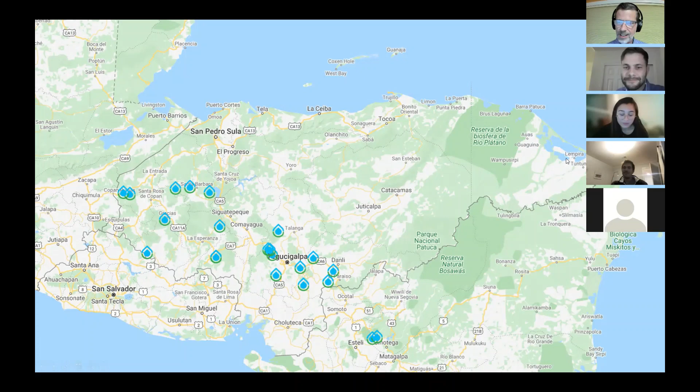And this is what happened. Last year, just a little over a year ago, 2 hurricanes went through Honduras. First came Eta, and there's its track. Then about 11 days later, they got hit by Iota. Those two hurricanes really dumped water on all of Central America, and obviously really hit Honduras and Nicaragua very, very hard. And there's San Nicolas.

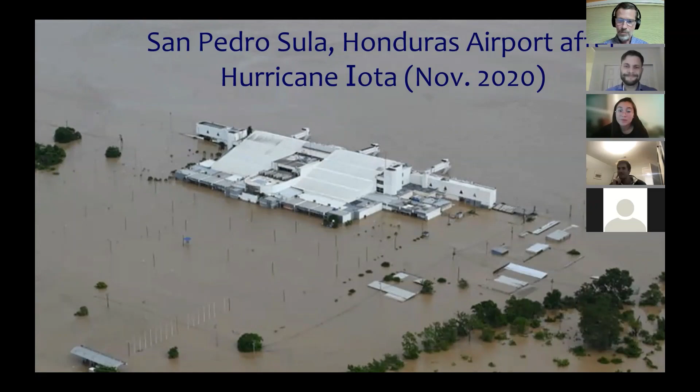I could have told stories about other plants, but I got good data for San Nicolas by going to Facebook. So Facebook is one of the sources of data for tonight. This is what happened in San Nicolas. And to give the context, this is the San Pedro Sula airport after the hurricanes - the airport where I brought several hundred Cornell students to Honduras over the years. So it gives you a sense of how much water hit Honduras.

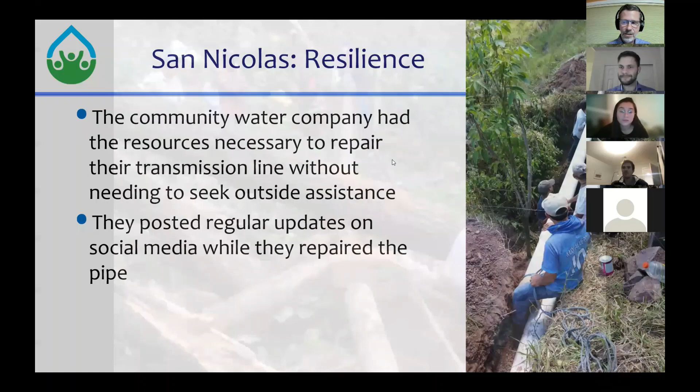So the story of San Nicolas is that the community water company had the resources necessary to recover from those hurricanes without needing to seek outside assistance. During the recovery effort, they posted regular updates on social media while they repaired their pipeline. The issue is that they have a 14-kilometer long pipeline, and there were multiple breaks in that pipeline due to rivers washing out the crossings. Here we see a tree that fell across their pipeline, and so they are getting rid of that tree.

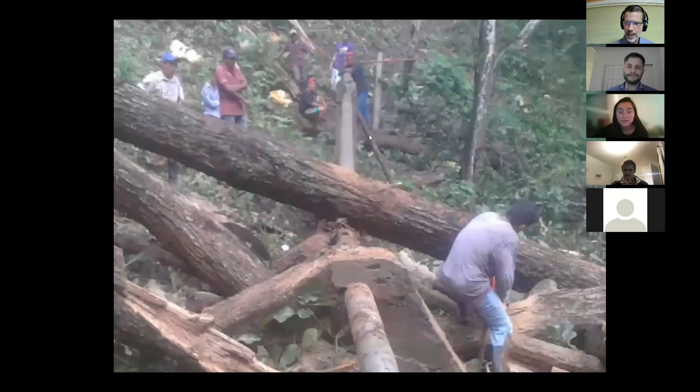They had to bring in more pipes to replace the pipes that were damaged or washed away. And so they worked for days to get everything repaired.

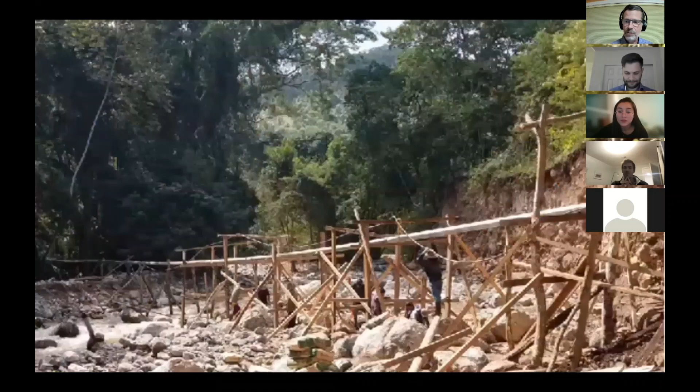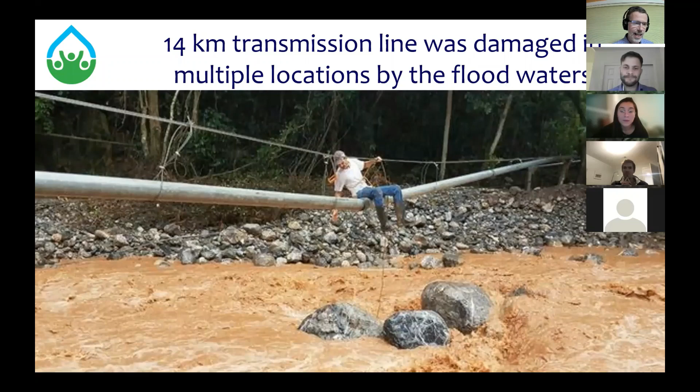You can see here one of the stream crossings where there clearly was a lot of fresh erosion on this stream from the hurricanes, so they had to reconstruct a crossing for the pipeline. And here's a pipe crossing where the pipe had broken. You can see the break right there, and here they are repairing that.

So all of that happened in about a week, and then they got water back onto the town. A week is a really long time to go without water, and there were lots of people posting on Facebook about how soon do we get water. But they worked at it, got everything fixed, and brought water back on.

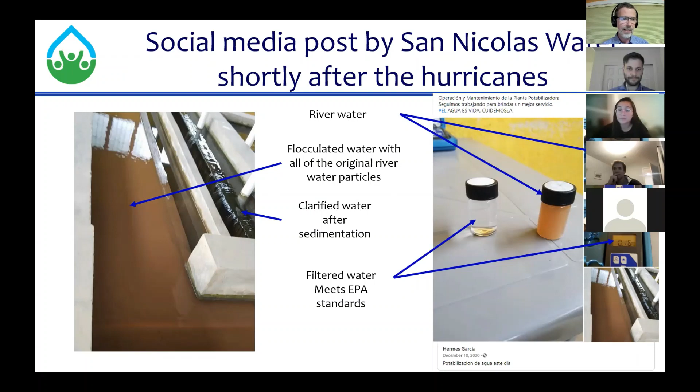Here's Tamara, the second generation AguaClara plant built in Honduras. Over the years they've consistently wanted to keep improving the plant to include the latest technologies that AguaClara was providing. You can see there's a blue section of the plant - that's where they added the stack rapid sand filter, added now 10 years ago. We're at the 10-year mark for the addition of the world's first stack rapid sand filter.

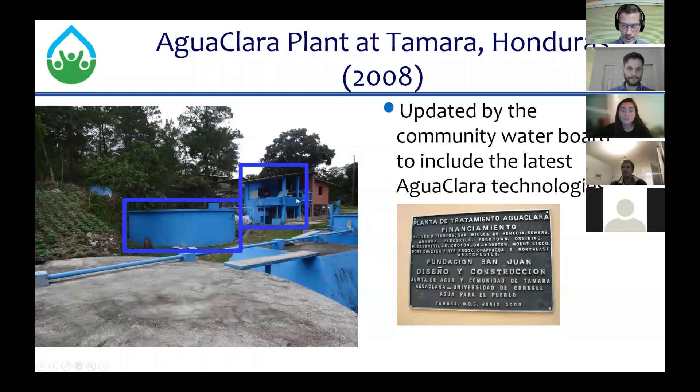They also completely financed, from the water tariff and from donations within the community from community members, this additional water storage tank so that they would have improved water service to the community. So all this is about investing in their own infrastructure.

Now a story about 4 communities in the valley north of Tegucigalpa, right next to Tamara. Another plant went in next in 2009, serving 4 villages that we now call Cuatro Comunidades. You can see where the water treatment plant is with the logo. Here's a photo of that plant and the operator Darwin. Inside the plant, it's a simple, 3rd generation AguaClara plant.

So now they have a water treatment plant, and they've got neighbors. There are communities close by who are seeing the difference in health of the children, and they're wanting water treatment plants too.

The next plant that really came online was Las Moras. It took 10 years, but Las Moras came online, funded almost entirely by the community. They raised community funds, saved for years to get the money. The women of the community really did the hard work of building that plant, and they've done it without outside donations.

So that's plant 2. The next one is completely different - this is Campo Verde, built by a developer. That developer apparently saw the benefit of having safe water for the development as part of the pitch, probably to get more money for those homes. So the developer looked at the Cuatro Comunidades plant and literally copied it - just looked at the plant and made another copy. Here it is - it's simple, it's rustic, and inside it looks a whole lot like the Cuatro Comunidades plant because it really is a copy.

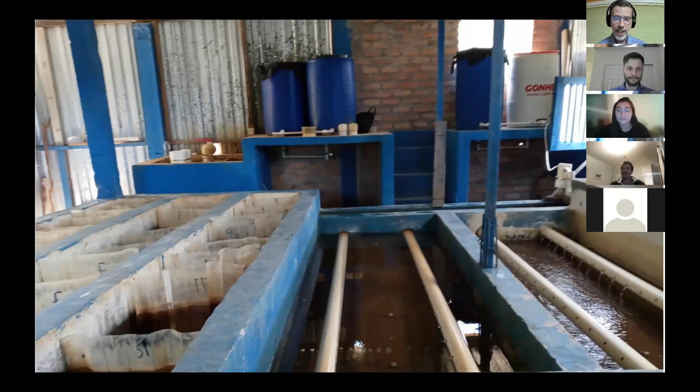So here's the Cuatro Comunidades plant, and there's the Campo Verde plant - they're just copies. So that's plant number 3. That plant was fully brought online just recently with additional technical help, because some of the inner parts were actually not done correctly since they were just copying and didn't get it right. But that plant has been fixed and brought online and is working.

The last example in this neighborhood is Divina Providencia. They built a competing technology, a multiple stage filtration plant, in 2010. That plant didn't work, and so they still don't have safe drinking water.

They have been trying to figure out how to get an AguaClara plant. This week, some of the women from that community were in the Agua Para el Pueblo offices, and paperwork is being signed - they are starting that project and will be obtaining financing through Azure, which is with the Catholic Relief Services. It's a finance program that will provide them with a loan to build the plant, and then they will pay that back over the next decade or so.

So 4 communities right next to each other. Once one community had a plant, they were all really eager to get an AguaClara plant as well. So the highlight here is that communities thrive with AguaClara. Households are willing to pay a higher tariff so that they can protect their watersheds, improve their water infrastructure, and be resilient when there's a hurricane. They're able to recover from a natural disaster, and the communities are eager to acquire AguaClara water treatment plants.

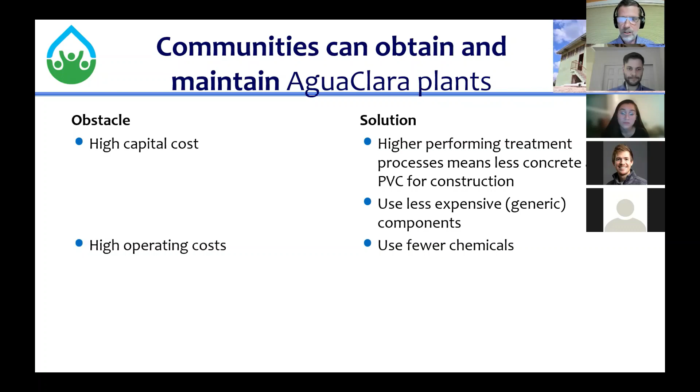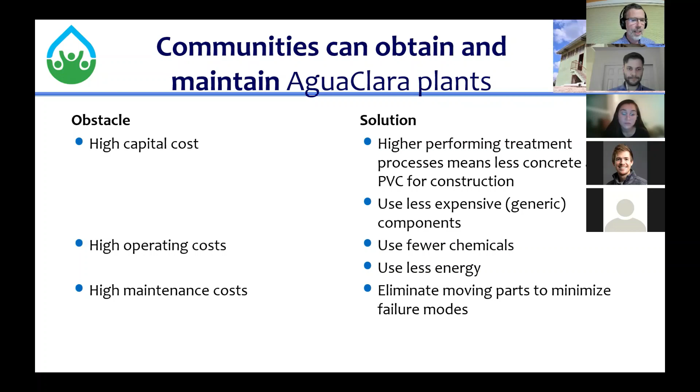To make it easier for communities to obtain and maintain their plants, the obstacles have been high capital costs. We're working at that by using high-performing treatment processes, which use less concrete, fewer bricks, less rebar, and less PVC, making them lower cost. We also use less expensive generic components rather than specialized proprietary ones. To reduce operating costs, our plants use fewer chemicals and much less energy. And to reduce maintenance costs, we eliminate moving parts to minimize failure modes. All of this makes it easier for communities to adopt this technology.

So what's our niche? Where does AguaClara fit into the global picture?

So let's think about this. There's 7.9 billion people on the planet, and people live in different sizes of settlements, everywhere from a single household out alone by itself, all the way up to Tokyo. At the single household level, maybe there's a few people, somewhere between 1 and 10 people, and all the way up at the other end of the graph is Tokyo with 37 million people. Everything else falls in between. I guess hermits are slightly down below that.

So the question is, where are all the people? The 7.9 billion people, I'm going to put them in these decades, groups of 10. I have pretty good information about where the people are at the upper end of this scale, and did some good guessing about what's happening at the lower end. I might be off by a factor of 2 in these numbers, but I think the point is still very clear. I've put the 7.9 billion people across these categories of sizes of human settlements.

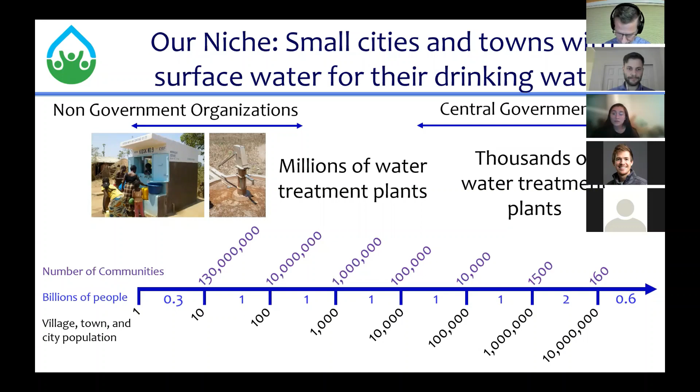When I began the AguaClara program—or maybe I shouldn't take credit for that, because I feel like students forced me to do this—anyway, when students forced me to begin the AguaClara program, there's a whole story there. Early on, we had this insight: we don't have the time to design custom water treatment plants for two communities per year.

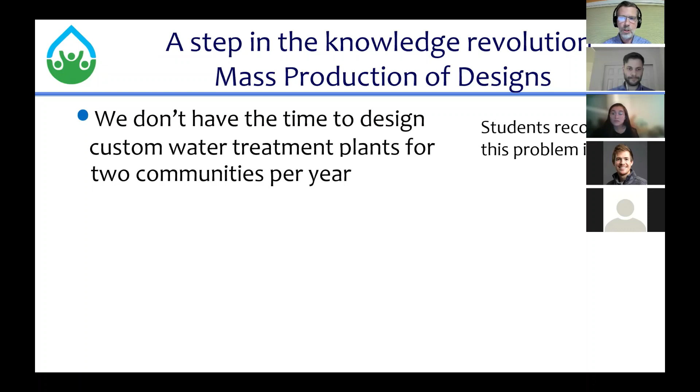At that time, we were just thinking about the thousands in Honduras. Just two years into designing, after designing the first plant and then the next two plants, students came back to me and complained. They said, we don't have the time to design custom water treatment plants for 2 communities per year. That was one of the things that really pushed me to begin thinking about how do we automate this design process.

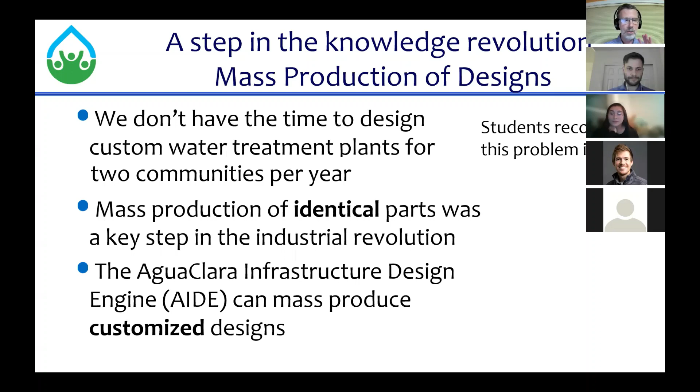Mass production of identical parts is something we all know about—that's part of the Industrial Revolution. The AguaClara Infrastructure Design Engine, or AIDE, is not about mass producing parts, it's about mass producing custom designs. So it's looking at it in a very different way, not mass producing parts, but mass producing customized designs.

So imagine this: imagine being able to instantly design an airplane based on the desired number of passengers. You'd go to your computer, pick your favorite language, and type in something like 'design airplane, passengers equal 4,' and there you go, you get a Cessna airplane. Then you decide, wait a second, I want a bigger airplane. So you type in 'design airplane, passengers equals 525,' and you get an Airbus 380.

Wouldn't that be amazing if you could just do that, simple, done, and get everything about that airplane? When you do that design, all the parts change—the type of engine changes, the number of engines changes, the number of decks on the aircraft changes, the size of the fuel tanks changes, the number of exits changes, everything changes. But there's one thing that doesn't change: in all cases, it has to fly.

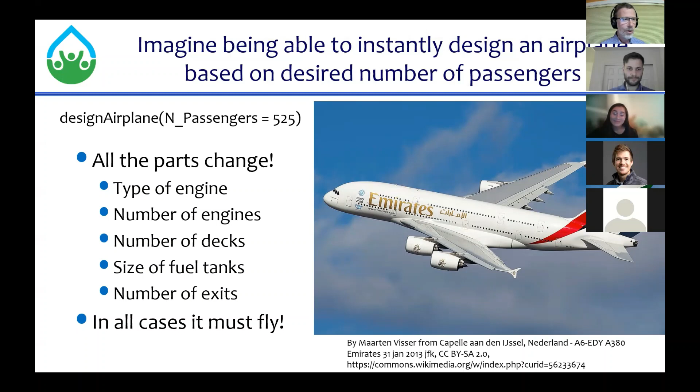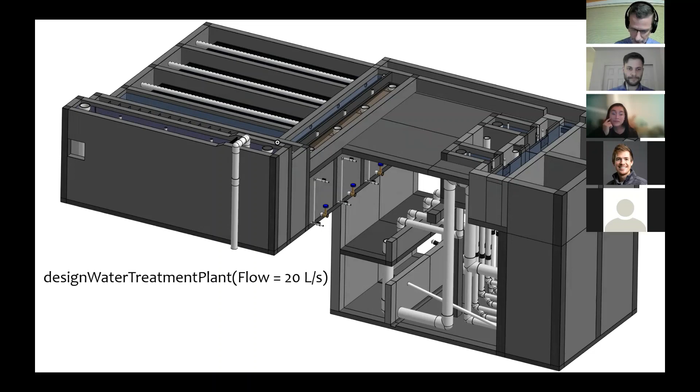And that's kind of like what we're trying to do. We're trying to design water treatment plants where you can type in a flow, say 20 liters per second, and get a design back for that water treatment plant. And if I change that 20 to 100 or to 2, I get another design back. And in all cases, the plant has to produce safe drinking water.

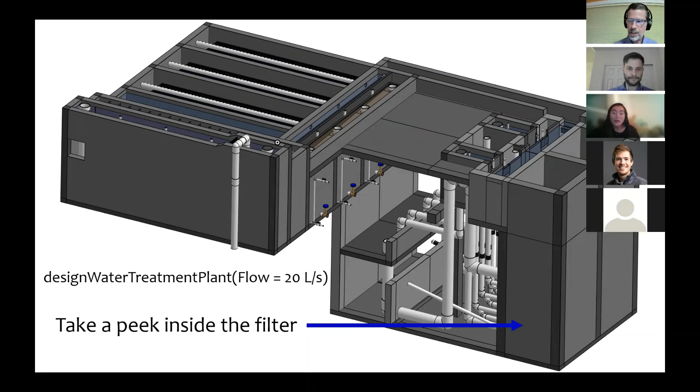And these designs have to be at a really high level of detail. They have to show all the parts. So just to illustrate that, we're going to take away the walls and look inside the filter. Inside that filter is a whole mess of pipes and parts, and there's detail like that throughout the plant that has to all be there so that it can be built.

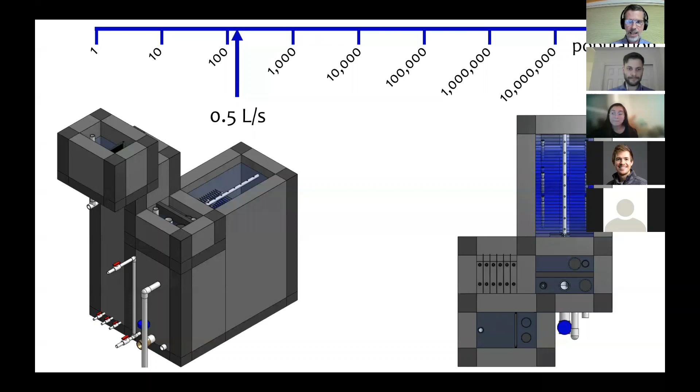And we have this problem of a wide range of community sizes that we're trying to provide designs for. So we're going to start at the bottom end of the scale, at about half a liter per second, which would be good for just over 100 people. Here's a potential design created by AIDE, the AguaClara Infrastructure Design Engine. It has an entrance tank, a flocculator, a clarifier, and it's tiny—its measurements are just a few meters long.

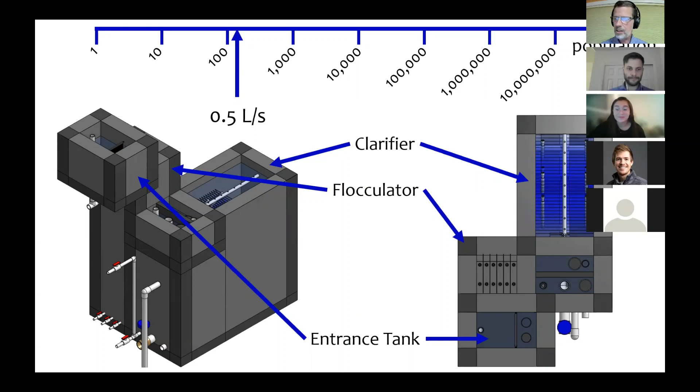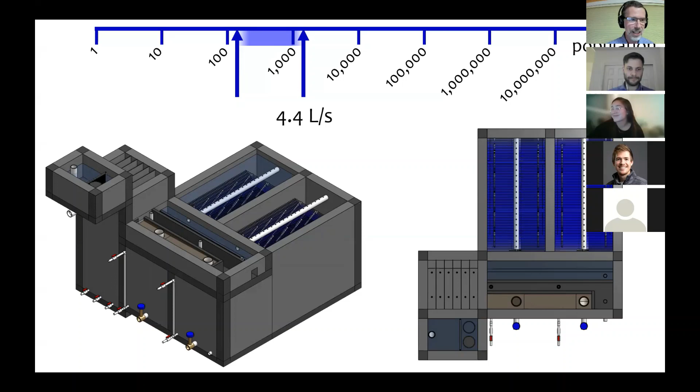We're going to go up again, now to 4.4 liters per second. Now we have 2 sedimentation tanks, so the number of engines just increased—we got 2 instead of 1, but we're still going to make safe drinking water.

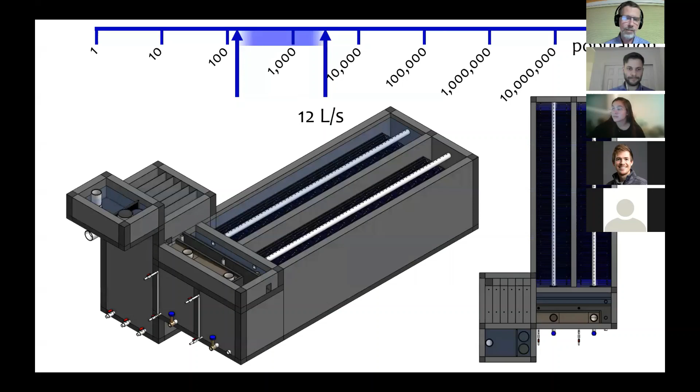We'll increase again, to 12 liters per second. Now our sedimentation tanks got a whole lot longer. The flocculator got bigger, the entrance tank got bigger.

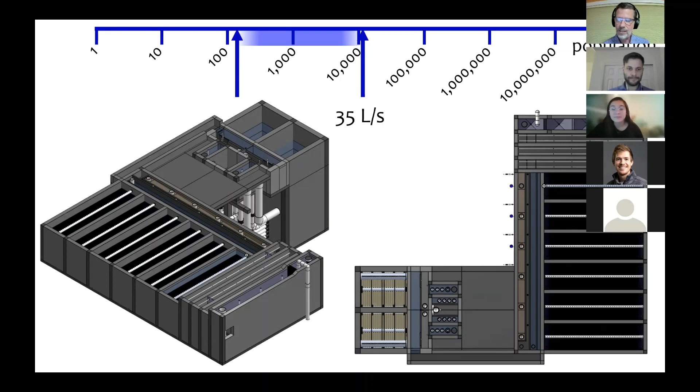Let's go bigger, to 35 liters per second. Now we're changing the design—we're switching to a stacked rapid sand filter made out of concrete. The reason I didn't show a stacked rapid sand filter in the previous designs is because that's still on our to-do list. So now we have 6 sedimentation tanks, a new version of an entrance tank, and a different version of a flocculator. We've kind of swapped out the kind of engines that we're using.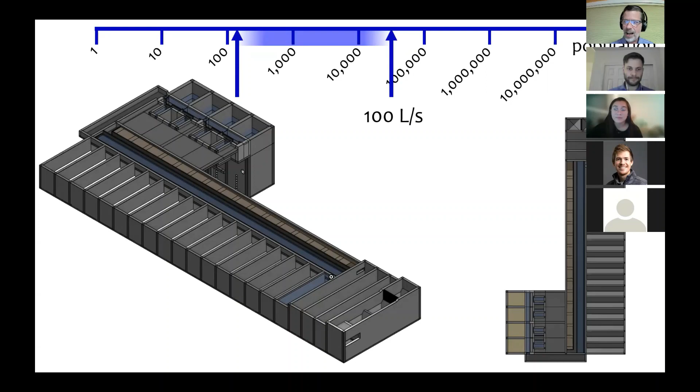And the last one, now we're up at 100 liters per second, a much larger plant. I'm no longer showing any details within this because it's too big of a design to actually show all the pieces. But there's 100 liters per second, 4 filters instead of 2. And at each of these designs, there's so much detail and so many things that have to be created—every single pipe has to be drawn, sized correctly, and placed in the right location. All that is done in the environment we're using, which is Onshape.

There are 2 more really powerful capabilities that this design tool has. It has the ability to create a bill of materials, which is like a parts list with prices and supplier information—details about where this part actually comes from. And the design is customized to use the parts and construction techniques for each implementation partner. So if Agua Para el Pueblo wants a plant or Gram Vikas wants a plant, the parts that go into it will be different, and the plant will be drawn differently because of that.

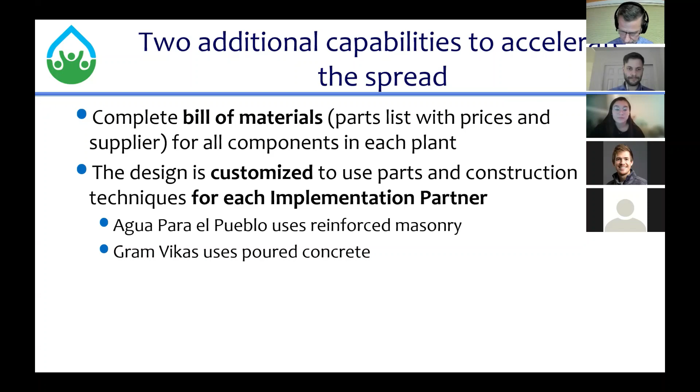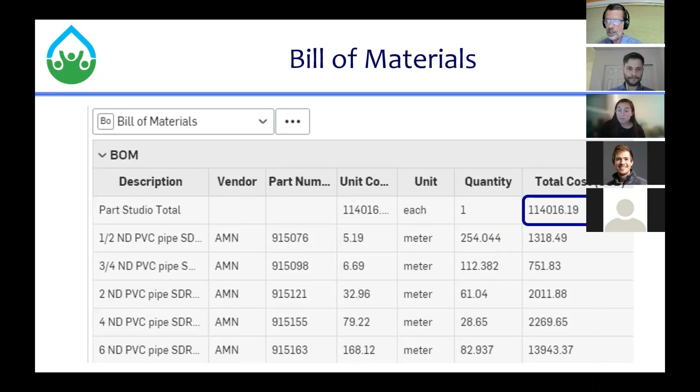So here's an example of the parts list—don't worry, we're not going to go through this table in detail. I just want to show you it creates this messy long table of all the parts. If we look in detail at just one part, there's a half-inch PVC pipe. We know who the vendor is, we know the part number, we know how much it costs, we know how many meters of pipe there are in this plant, and we know the total cost of that piping. We also know the total cost of the materials that go into making this plant—this was $114,000 just in materials for that particular plant.

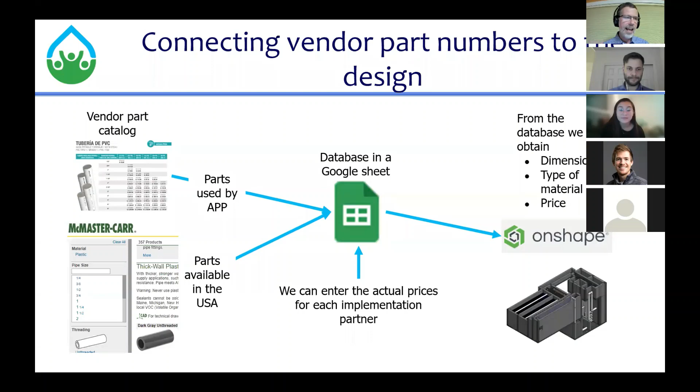So how do those parts get in there? It starts with parts catalogs, the information we get from the implementation partners about where they get their parts. We put that in a Google Sheet that ends up being transferred into Onshape, and every part, as we create it, is pulled essentially from that database. So when we're drawing a pipe in Onshape, we have to say, who's that pipe for?

Is it for Agua Para el Pueblo or Gram Vikas? Because they're going to have different suppliers. And then we say how big we need that pipe to be and how long it needs to be. We get a pipe in Onshape, it draws the pipe for us, and it immediately puts it in the parts list so that we know what that part is and how much it costs.

One of the cool things that this allows us to do is to immediately see the impact of cost on our designs. So when we're comparing different design alternatives, we immediately see at least what the parts cost impact is.

So this automated design approach reduces the project startup costs and makes it easier for communities to go through the project cycle, where they're not caught in this trap of needing money to get started, needing money to get a design so that they can actually get started. This allows us to provide designs at no initial cost because it doesn't actually take us much time at all to provide that initial design.

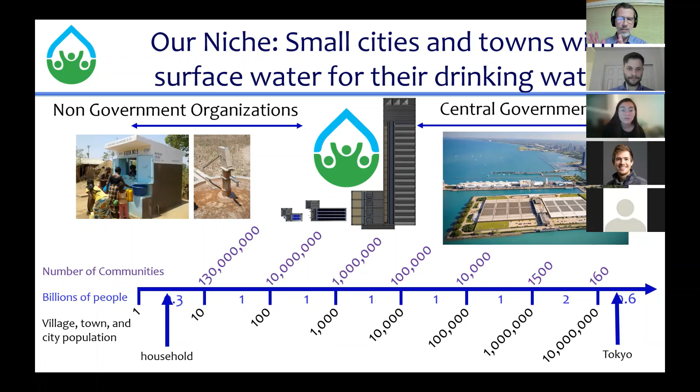So our niche is in this middle territory, maybe between a couple hundred people and several tens of thousands of people. That's where this design tool is filling a need, and where we hope to be scaling up in the coming years.

I want to also share briefly about how information flows in this network. Because the AguaClara ecosystem isn't just AguaClara Reach, it's a whole network of organizations. First of all, there's supporters and volunteers. AguaClara Reach is primarily a volunteer organization. There are 2 paid employees — I get to be one of them, and Izumi gets to be the other. But there are many, many volunteers who help make it all happen.

Then there's the university groups, and you've met the 3 university group leaders tonight. That's the RIDE program: Research, Invent, Design, Empower. That's where new ideas are being generated and new processes for treating water are being developed.

We're also working with the partner organizations that are building these plants. The partner organizations get from us the designs, and we provide technical support and best practices. They in turn give insights about the best ways to design the plants, to make them easier to fabricate, or to improve how they operate in the field. And they also send back problems that they encounter.

So now you're wondering what's next — or at least I'm wondering what's next — for AguaClara Reach. Because we've made incredible progress on the design tool this year, there's still more work to be done. One of the pieces we have not yet finished is the whole chemical dosing system, how we add chemicals into the plant. These are some parts we've already been working on, but there's more work to be done there.

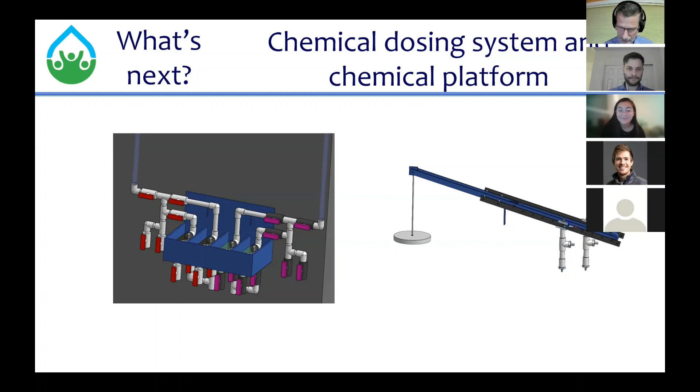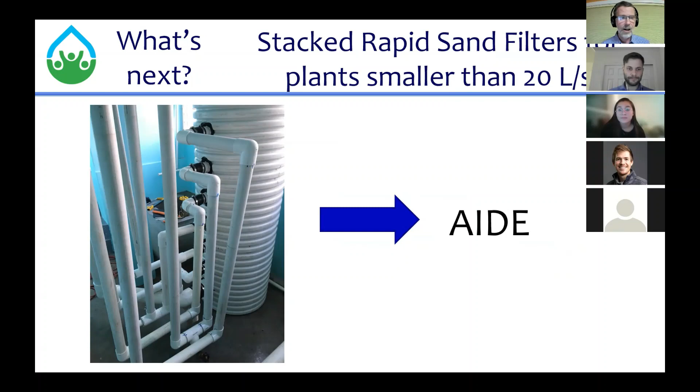I mentioned that I'm not showing the stacked rapid sand filter for the small plants. So we have stacked rapid sand filters that have been built, but we don't have a design for that yet in Onshape, so that's on our to-do list.

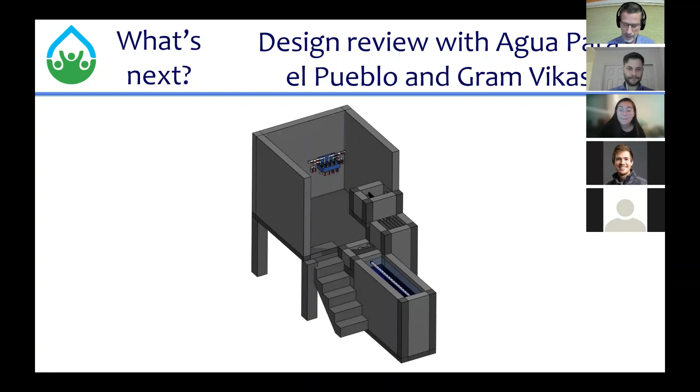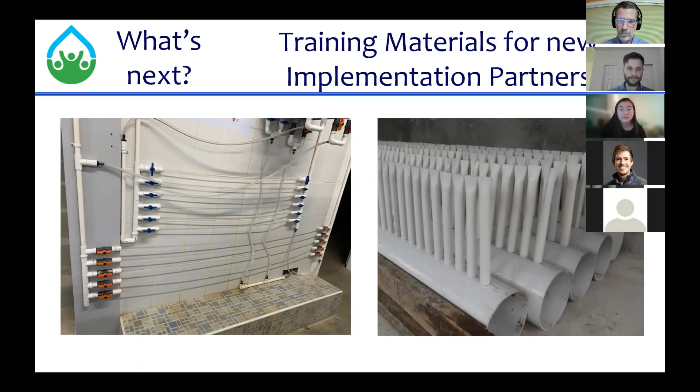There's this ongoing review process where we create designs, and then we meet with implementation partners, Agua para el Pueblo and Gram Vikas, and get feedback about what works for them — how they would actually like this to be customized to make it work well for the site they're putting it on. And I don't have any great images for this, but another big task for us is to create training materials for new implementation partners so it's easier for them to learn all the fabrication steps that go into building these plants.

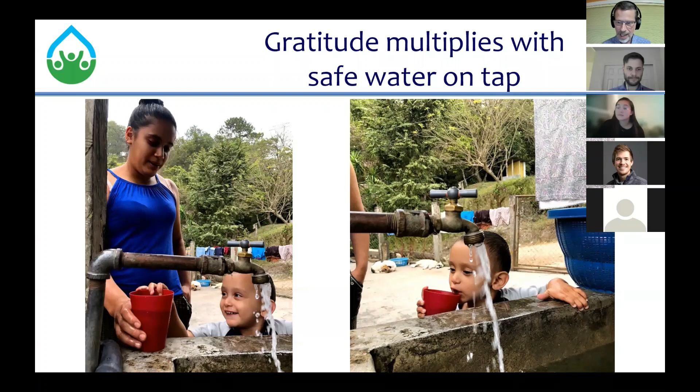So, gratitude. Gratitude multiplies with safe water on tap. Here are just a few lovely pictures taken by students a couple of years ago, on our last trip to Honduras. Gratitude, having safe water on tap, a real smile.